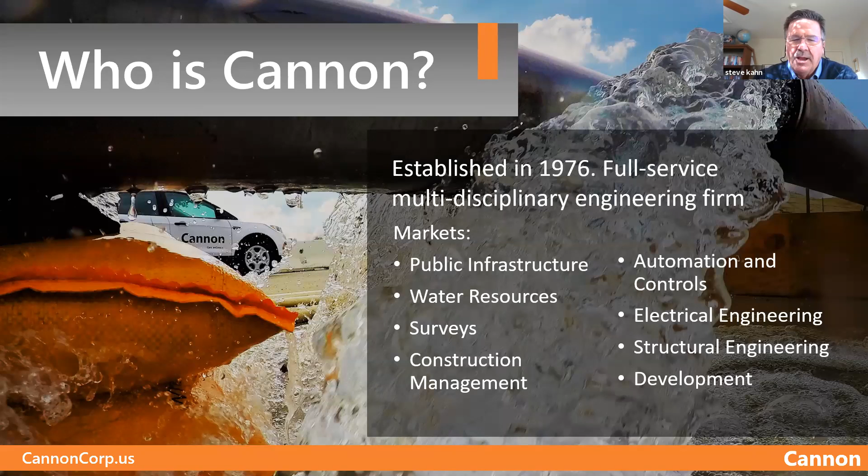Thank you, Amy. Again, my name is Steve Kahn. I'm a senior principal civil engineer for Cannon, and I would like to briefly tell you a little bit about Cannon Corp. We are established in 1976. We're a full-service, multidisciplinary engineering firm. That's a real mouthful, but that's what we are. Below listed are all the markets that we work in, and I'm going to tell you briefly about those markets.

Our main office is in San Luis Obispo. We have offices in California and Washington. Our office in San Luis Obispo is on Southwood Drive near Sinsheimer Park. It's a nice modern facility. All our conference rooms have video conferencing capabilities. We do a lot of video conferencing with our other offices, so when the pandemic came around, the system worked really well.

Our services: we do public infrastructure, led by Larry Kramer. Active transportation, we do funding administration, helping agencies deal with federal funding. A lot of streets and highways, design and construction management. We also do water resources - water, wastewater, stormwater - that's led by Larry Kramer also.

We do electrical engineering, also led by Jeff Spanbauer - pretty impressive group. Medium, low, and high voltage systems, arc flash, everything to do with the delivery of electricity to facilities.

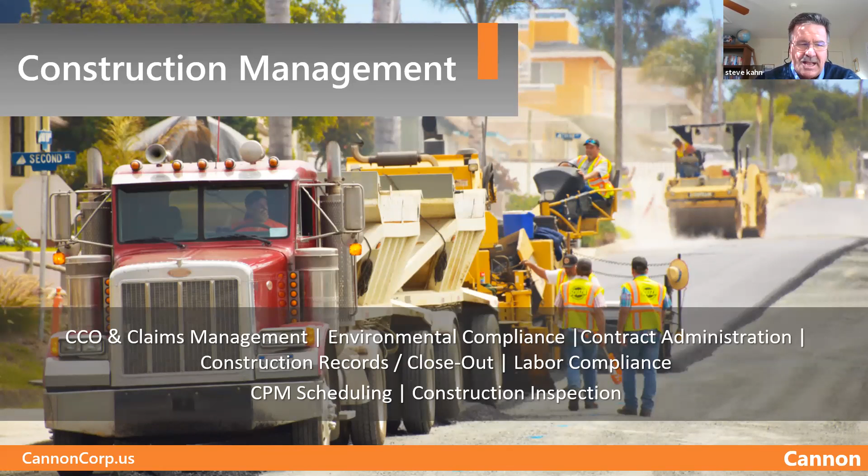We do a lot of surveying, all the surveying listed below with what we do. We also do construction management. I recently completed the Shell Beach Road project for the city of Pismo Beach, and also the Pismo Beach Promenade at the pier. We managed that project for the city, and whenever you get down to Pismo Beach, check out the new Pismo Beach sign by the pier and the slide. It's really quite an impressive facility.

We do energy and industrial throughout the state of California. We do a lot of work for Southern California Gas. And then we do structural engineering throughout the state. We also do a lot of development engineering. We do a ton of work for Cal Poly. We do commercial, industrial, and residential projects.

Some of our local clients: Vandenberg Air Force Base, we do a ton of work at Diablo Canyon. I just completed the construction of a road for PG&E from the power plant to Montana de Oro. Residential projects, we're doing work for the city of Morro Bay, delivery of water and wastewater collection, roads for Oceano, Grover Beach.

And then we're very involved with Cal Poly. Mike Cannon, the founder of the company, is a Cal Poly alumni, and so am I and many of our employees. We sponsor the Water Lab, the Concrete Canoe Program, the Cal Poly Golf Tournament, and I'm on the Cal Poly IAB board to help the civil engineering department set their curriculum.

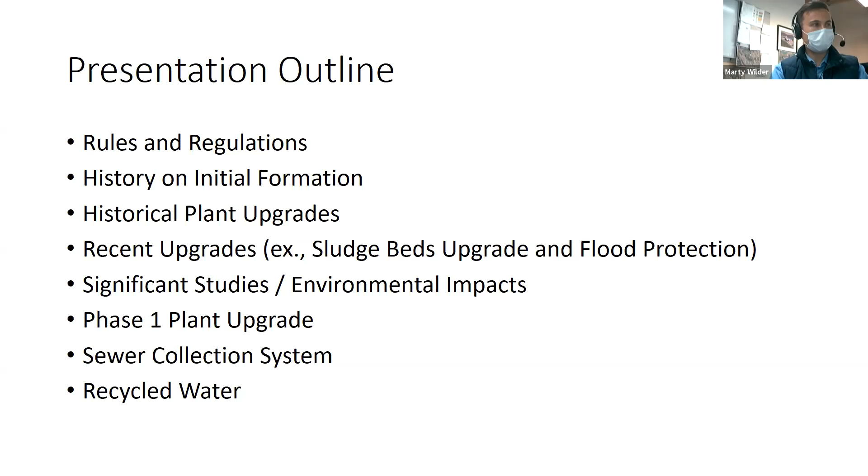So rules and regulations: the district was formed pursuant to the Health and Safety Code. The reason why it's called Laguna County Sanitation District is because it's pursuant to the County Sanitation District Act.

It's a dependent special district to the County of Santa Barbara, meaning that the Board of Supervisors act as the Board of Directors for the district.

A little fun fact, per the Health and Safety Code, as a county sanitation district, we may make provision to enable street cleaning services, street sweeping, refuse transfer or disposal, or even water treatment and distribution. Right now, we're only exercising one of those four arms, which is sanitation services: sewer collection, treatment, and disposal.

We're named after the Rancho Punta de la Laguna, and in another slide I'm going to show some historical maps, and you'll see why that's the case.

In the Santa Barbara County Code, chapter 29 really has a lot of meat there that we lean on, and 24A contains enforcement provisions for violations. We're regulated by state and regional water resources control boards for treatment and disposal of wastewater.

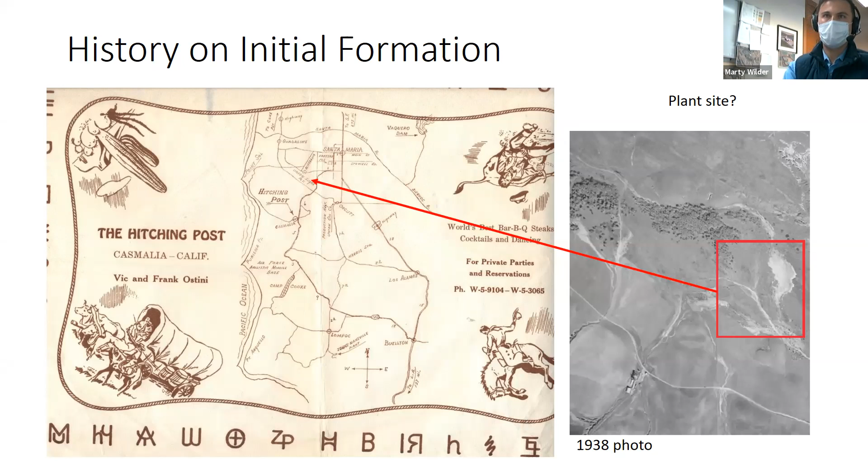The initial firm, I'll tell you their name because we'll pay homage to them: Whipple, Adamson, Murphy, and Pearson. They generated the initial boundary, at least what they thought it would be, and put a lot of thought into the construction cost estimate, which led the Board of Supervisors to thinking about how they were going to finance the original plant.

The cost to build at the time was $1.4 million. In today's day and age, that's greatly inflated, so you can imagine what it was back in 1960.

Options for financing that were thought about at the time were bonding, but the district couldn't afford the upfront cost, which was around 10%. So they actually considered selling general obligation notes for about three-quarters of the amount, but even then, that wasn't enough to cover the whole $1.4 million.

So they were able to successfully get a federal grant for $250,000, and then the county stepped up to the plate and promised to pitch in the rest if the district was not able to recuperate connection fees to pay the remainder in time.

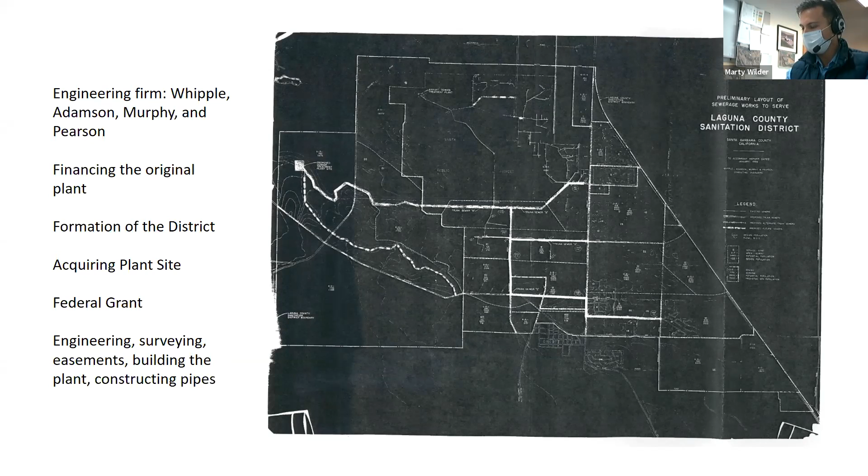Here are some maps showing where they happened to locate the plant. It's called Laguna County Sanitation District, like I mentioned before, because it's located on lands of Punta de la Laguna, which happens to be the name of the subdivision. There actually used to be a lake that would form there. Since then, farmers have modified it such that it does not form anymore unless it's a very, very wet year, and then only portions could form. But approximately at the southern edge of Lake Guadalupe is where the plant site is.

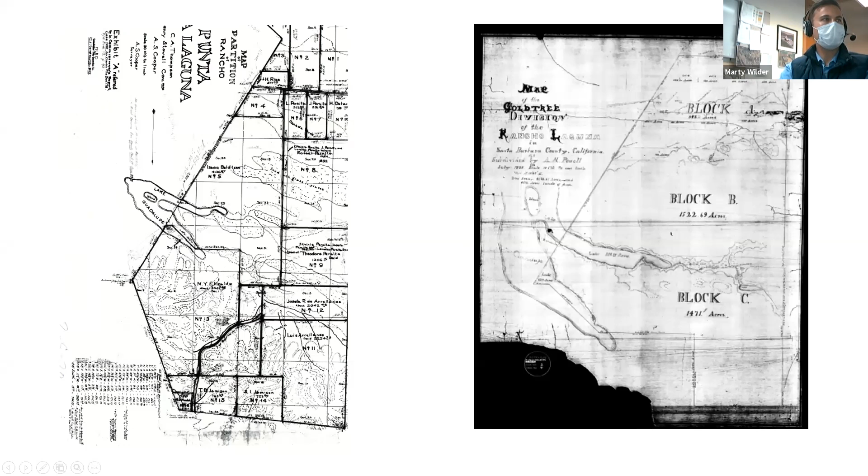It was put into operation on December 7th, 1960. So if you do the math, that's less than two years from the initial forming of the district to putting the plant into service, which includes all the engineering work, then putting the project out to bid, then building it. I think that's a very significant feat.

So let's talk a little bit about the original plant. Happens to be a conventional trickling filter plant. So I'll give a brief background on wastewater treatment plants and how they work.

There are 3 different types of treatment: physical treatment, biological treatment, and chemical treatment. Physical treatment, for example, like screens or using gravity clarifiers to separate suspended solids, or even using more modern filters like reverse osmosis to remove dissolved solids like salt. Biological treatment, for example, a trickling filter removes carbonaceous material, which lowers the biological oxygen demand, which is good for discharging into a water body. Chemical treatment, for example, chlorine disinfection.

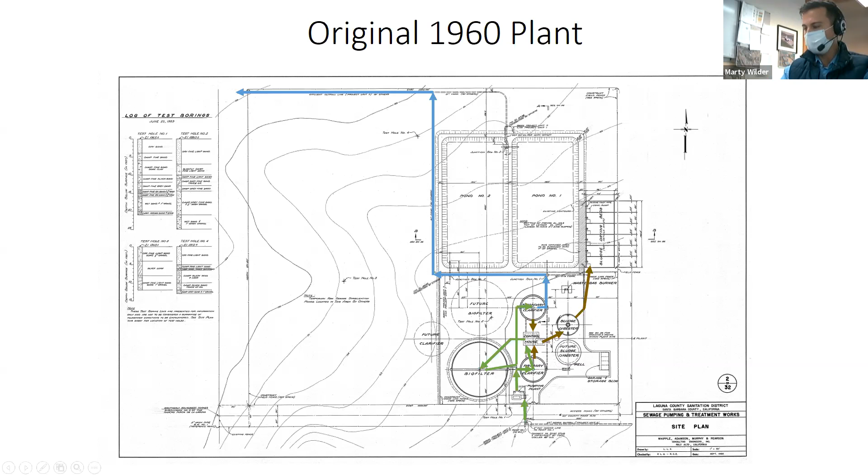And then the brown lines show where sludge goes to, and it would go out to sludge drying beds. I want to share a little more about the original plant. It was designed with a capacity of 1.6 million gallons per day.

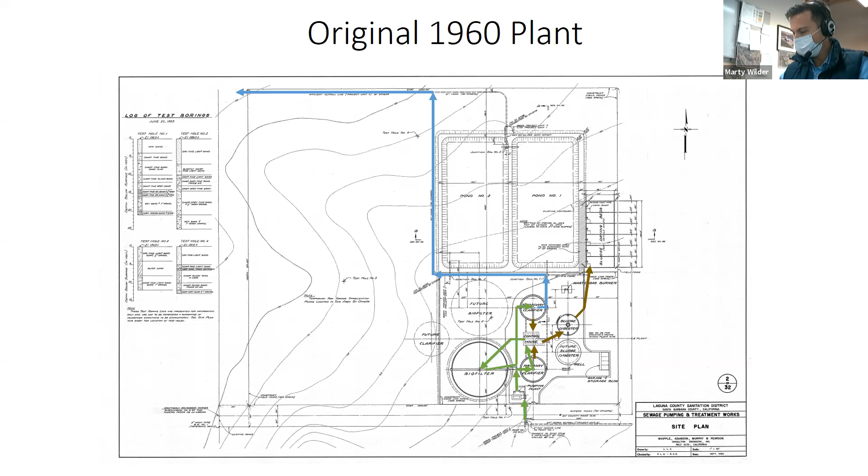The 1974 plant upgrade designed the project with a capacity expansion to 2.4 million gallons per day by making pond modifications, adding a grit chamber, a primary sludge digester, and a chlorine contact basin.

A holding pond, pump station, and pipeline were also constructed to facilitate irrigation and discharge to additional land areas. So by this time, they actually were starting to irrigate by land disposal instead of discharge into the creek.

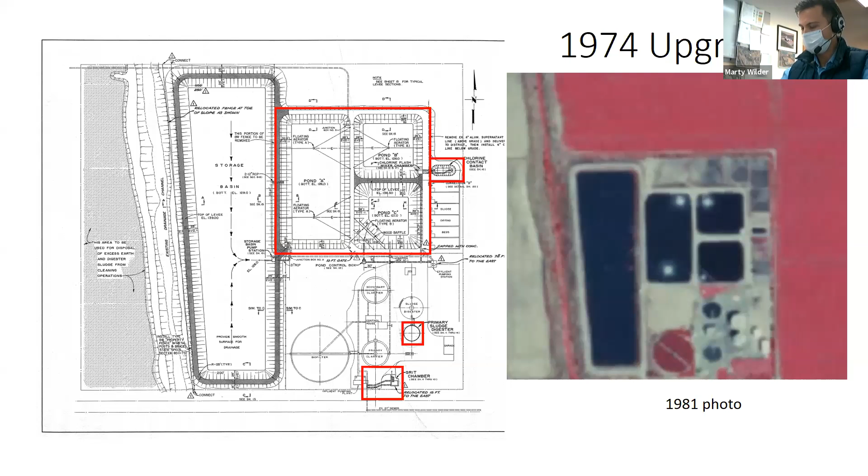The 1986 plans designed a project with capacity expansion to 3.2 million gallons per day by making modifications to the influent structure, adding a secondary clarifier, converting the existing north secondary clarifier to a primary clarifier, and adding ferrous chloride to the primary digester. Although the plant was expanded to 3.2 million gallons per day, an order from the water boards limited the discharge to 2.4 million gallons per day.

This limit applied until objectives for total dissolved solids, sodium and chloride, also known as salt, described in the water quality control plan for the Central Coast Basin plan adopted by the water boards, were achieved if the discharge was outside of the designated recharge area. Discharge continued to be via irrigation.

However, this sugar beet factory, which was the primary source of irrigation demand in Betteravia, closed down in 1993, and irrigation switched from sugar beets to solely beef cattle pasture. The main recharge area had a limited discharge capacity based on evapotranspiration, and therefore the district could not accommodate new customers pursuant to growth planned in the Orcutt Community Plan, resulting in a building moratorium.

So you can imagine that that's not good. We want to try and avoid that.

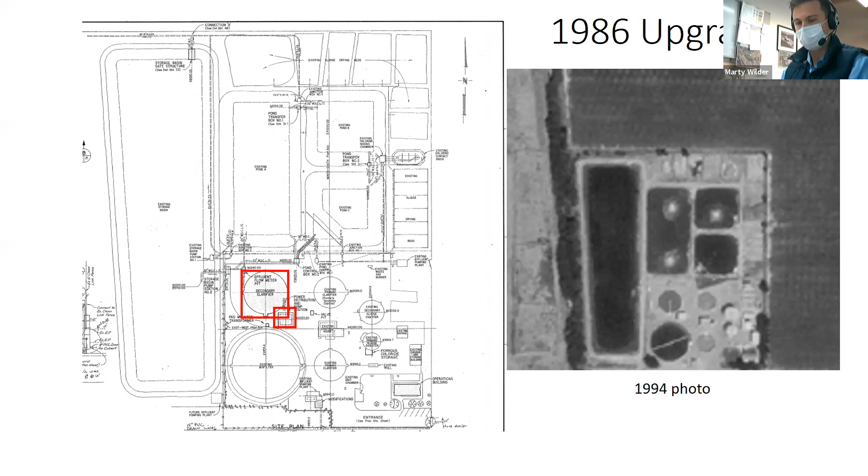The 2001 plans really tried to get us out of that building moratorium, designing a project that addressed the regulatory upgrade requirements to comply with the water quality objectives for groundwater, for TDS, total dissolved solids, sodium and chloride.

Studies adopted into the water quality control plan for the Central Coast Basin demonstrated that there is a dramatic increase in salt load from the point of use to the sewer system. This increase in salt load is partially due to the typical mineral pickup from domestic water, but primarily due to the prolific use of regenerative salt load water softeners.

Nearly all of the potable water supplied to customers by the local water purveyor is hard groundwater, meaning it has relatively high levels of calcium carbonate and equivalent. To combat this, there's actually a prohibition for new houses to have salt load water softeners.

But so what this plant did is it built a second treatment train to treat the high salt load flow stream, sized to about 500,000 gallons per day, which got us back into compliance, and the building moratorium was lifted.

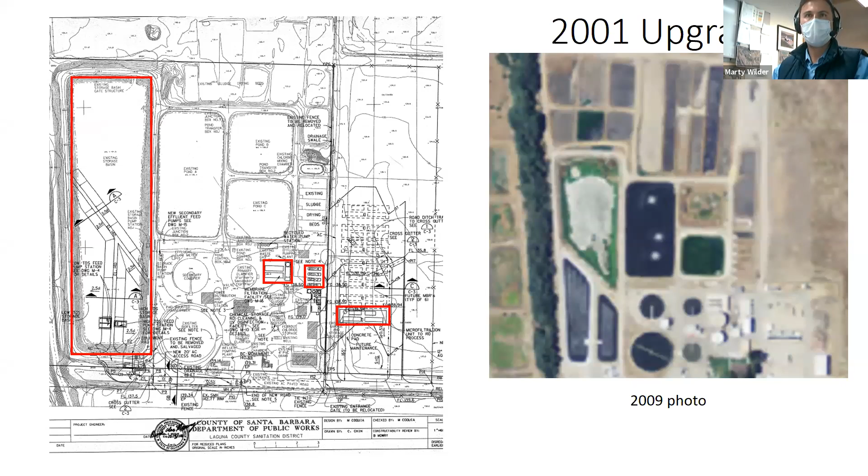So now let's look at the current plant layout. Wastewater initially collects at the influent structure and is diverted to the aerated grit chamber, then back to the influent structure for screening. Primary settling occurs at the two primary clarifiers, which we previously discussed.

Secondary treatment is achieved through the trickling filter. Water flows through polishing flow equalization ponds, followed by tertiary treatment using ultrafiltration membranes, which were built in the 2001 plant upgrade.

Reject from the ultrafiltration membranes, or screened flow from the low TDS flow, is stored in a shotcrete-lined pond for pumping through these plant processes during the separation of the high TDS flow.

When salt concentrations are detected by an electroconductivity meter in the grit chamber, typically around 5 a.m. to 10 a.m., wastewater is redirected as high salt flow using pumps back to the rotary drum screens and to the high TDS equalization pond.

This flow is pumped over the course of the next 24 hours through a membrane bioreactor, which was built in the 2001 plant upgrade. So that's on the right-hand side.

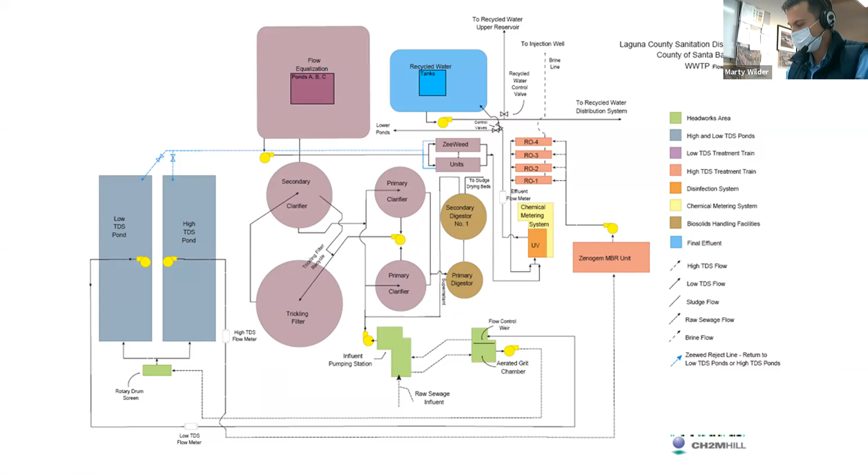The high total dissolved solids permeate is blended with the low TDS permeate as described, then sent to disinfection by ultraviolet light radiation. Final effluent meeting disinfected tertiary recycled water standards is sent to two 1-million-gallon holding tanks with a recycled water pump station to move water to either offsite users or to long-term storage.

Long-term water storage is water that is not used on daily demand and is stored for discharge throughout the year on district-owned cattle pasture. The plant has full backup power generators that are engaged during power outages in order to run the whole plant.

In the event that only undisinfected secondary treatment is produced, for example, if tertiary treatment systems are down for maintenance, replacement or repair, or the ultraviolet dose is not sufficient, water is transferred by gravity to lower storage ponds for later discharge on the district-owned cattle pasture.

Biosolids from the two primary clarifiers and the secondary clarifier are treated through a heated and mixed anaerobic digester, followed by decanting and an unheated, unmixed secondary digester. Sludge from both digesters is sent to sludge beds for drying and hauled off annually, happens to be to Engel and Gray composting facility, which is nearby.

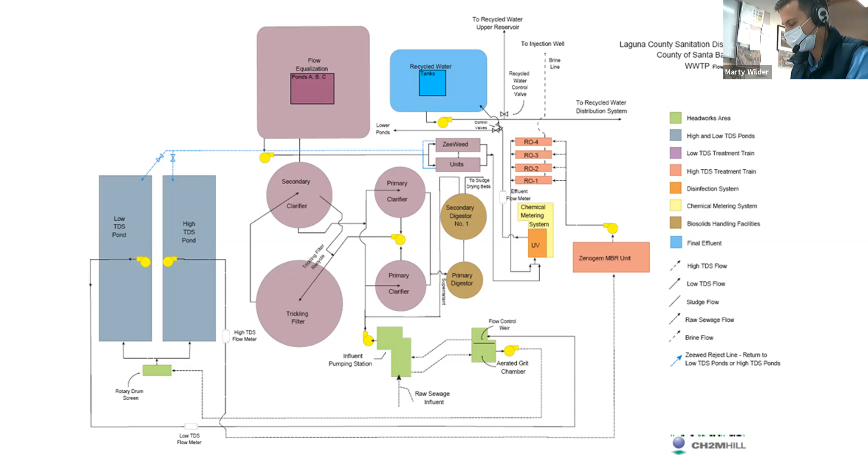All right, so now that you know what the plant currently is, which dates back to around the 2001 upgrade, let's talk about significant studies that were done from then until now.

In 2001, we hired a consulting firm, CH2M Hill, to produce a report entitled Wastewater Reclamation Treatment Plan, Conceptual Master Plan for Build Out to 7 million gallons per day. This report reevaluated the connection fee based on the regulatory compliance upgrade, the 2001 upgrade, and anticipated future improvements.

In 2008, the same firm produced another report. This report analyzed the cost of various effluent discharge mechanisms, environmental regulations, permitting, and physical capability limitation factors.

Given the conventional useful life of 40 years for much of the existing plant facilities and limited redundancy, the district commissioned a master plan in 2010 to assess existing plant facility condition, useful life, functionality, future planning, regulatory climate, and costs for improvements. The master plan identified several projects, including solids handling improvements, replacement of wastewater treatment facilities, and a future expansion.

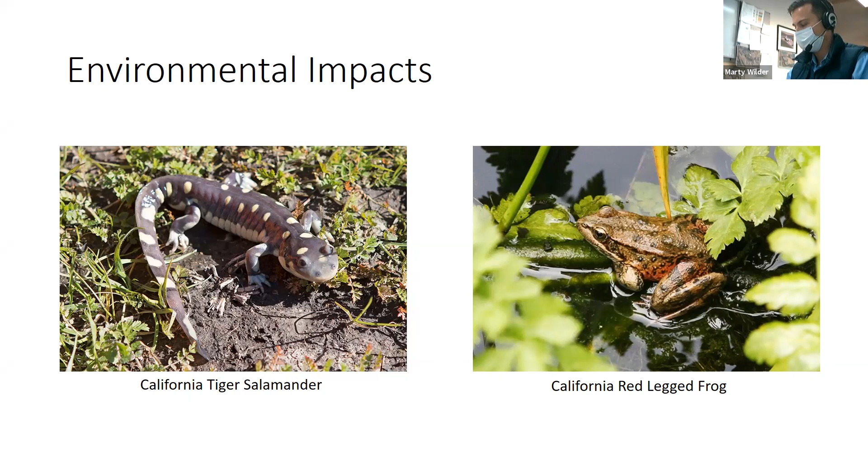Other miscellaneous projects we started working on almost immediately included burying a 12-inch effluent recycled water line heading to the reservoir. At the time it was just laid flat on the ground, but we wanted to bury it so it's more protected from the sun and from people driving over it.

We also created a vernal pool. Quad 3, as I mentioned before, is the documented breeding resource for California tiger salamanders and red-legged frogs. In the past couple years there hasn't been much documented breeding activity, which isn't alarming because it has to do with rainfall. There have been times when biologists won't find them for a couple years. They come out to breed when it rains, then go hide in burrows created by other small mammals such as gophers, sometimes for years on end.

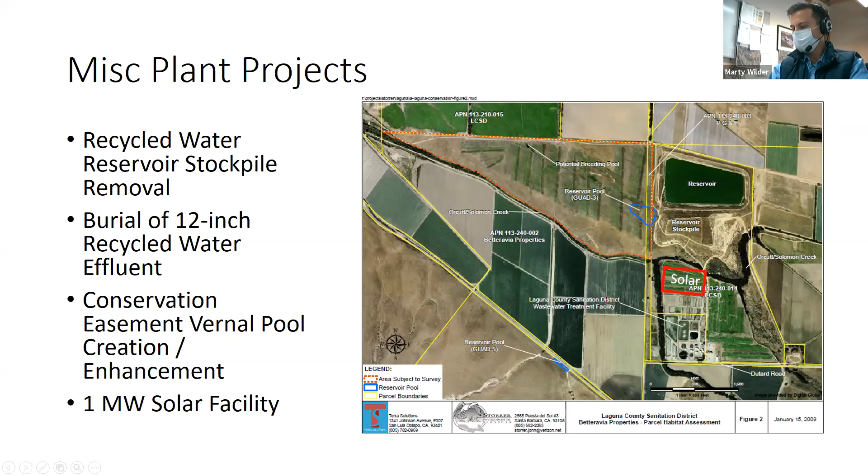Total project cost was around $4 million. Yane Associates was the geotechnical firm for the initial study and review during construction. Earth Systems Pacific handled compaction testing, construction testing, and concrete testing. Cannon was the design engineer and also helped with submittal review during construction. We did construction management in-house.

Some brief facts about sludge: it comes in from primary and secondary clarifiers and enters the sludge beds at about 5% solids by weight, which is pretty soupy, not very solid at all. Then it dries up to 85% solids, which is almost like moist soil. We produce several hundred tons annually.

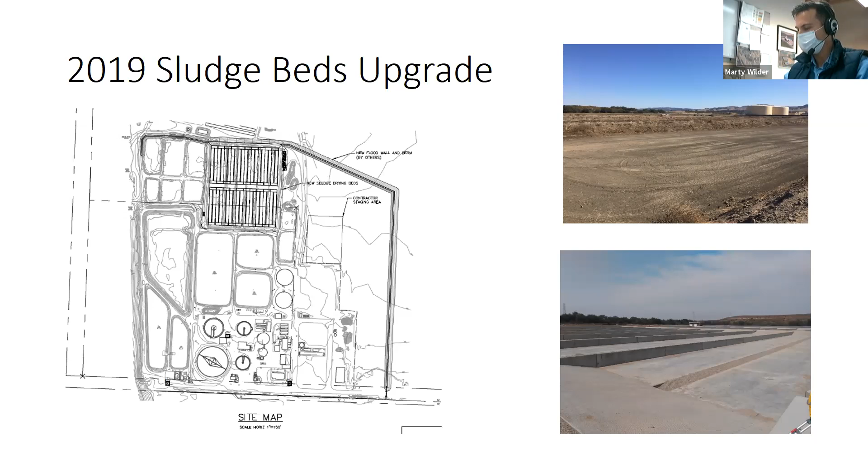This project is substantially complete, with final completion scheduled in the next week or so.

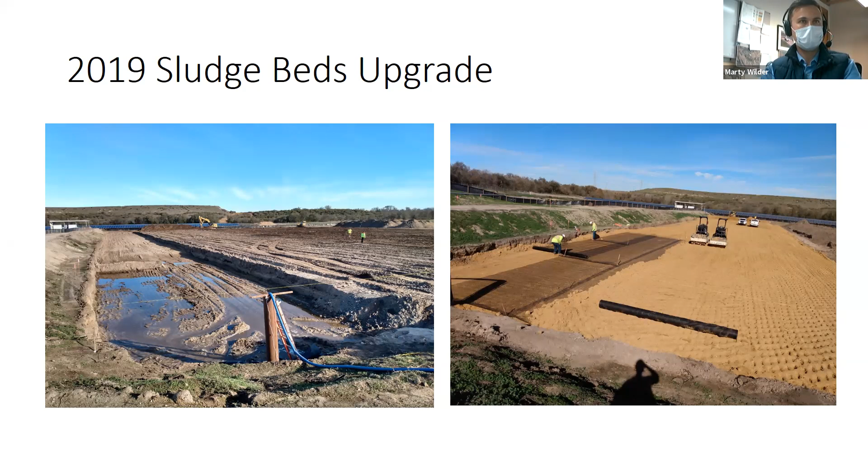Some challenges we faced during this project: when we did our initial over-excavation, we hit a perched water level, and in the left photo you can see the water we hit. To combat this, working with Yane Associates, we used geotextile and geogrid, and in cases where it was really bad, we put two layers of it. The golden dirt, as we'll call it, is actually from the reservoir soil stockpile, so it had optimum moisture and good compaction characteristics. We did this for the whole site.

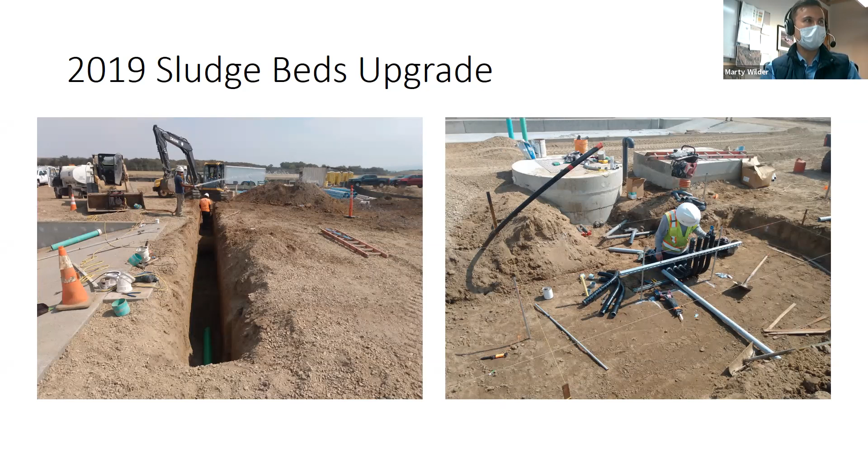Other challenges we faced: in the right picture, we upsized our electrical feeding to the wet well. On the left, we found out there's state criteria that even when the biosolids are dried to 85% solids and ready to be hauled off, the state wants us to place it on a lined surface. To do that, we're designing a pad with a little drain for when it rains, and we extended a drain out to that facility, which is actually going out to bid pretty soon.

The next project we worked on simultaneously was our flood protection project. 2011 and 2014 flood studies, which Penfield and Smith helped with, determined that the plant was in a 100-year floodplain. So they designed a flood berm with a concrete slurry core and a flood wall to extend around the perimeter of the facility, as well as the future plant upgrade.

We put this out to bid with a total project cost of $1 million. We did apply for a federal grant, but unfortunately we were unsuccessful. Just to give a little background, there was $400 million of requested applicants with projects equating to $400 million, but only $100 million available.

This project was needed prior to the phase 1 plant upgrade, and we were able to successfully complete it ahead of schedule. Construction management was in-house. Stantec was the design engineer and provided review during construction. As you might be aware, Penfield Smith actually changed names and got absorbed by Stantec, so that was a pretty smooth transition since they helped with the flood studies. Earth Systems Pacific helped with the geotech for the initial study and field testing.

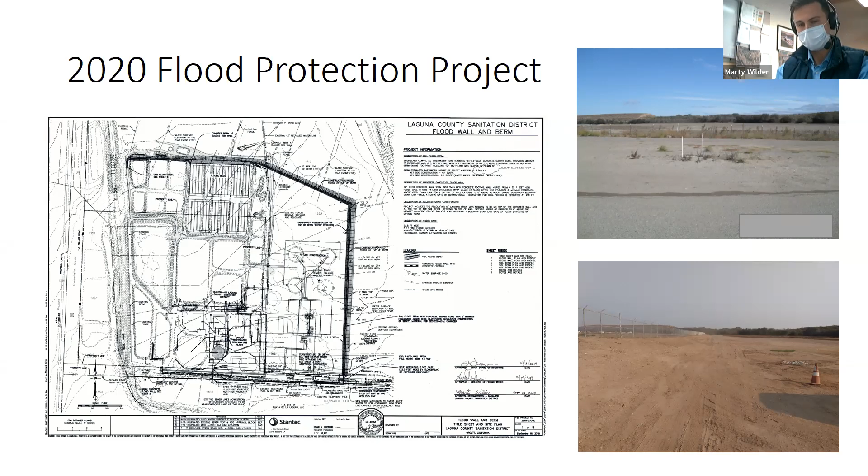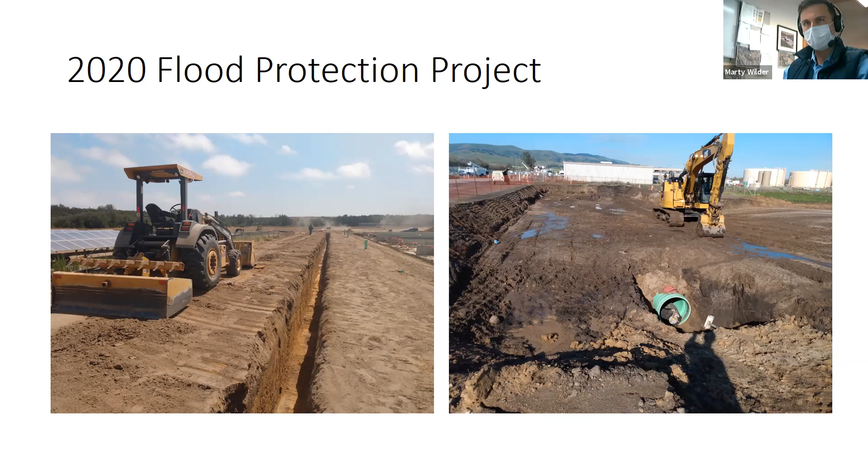Some project challenges we had to coordinate - again this was during construction of the sludge beds project. We had to coordinate excavation of the northern part of the flood berm slurry core, shown on the left-hand side. Also, we had to install the first leg of 36-inch pipe, which was used by the plant upgrade, so we had to make sure it was surveyed in correctly at the right slope, and pressure tested and mandrel tested and all the above so it could be used for the plant upgrade. In addition, over-excavation was done for parts of the berm that had substandard material.

Other challenges we faced - on the left-hand side, that's where the flood wall foundation was being built, and there was a conflicting electrical utility. So we flip-flopped the location of the keyway for the foundation to overcome that. In addition, similarly to the sludge beds job where we used geotextile mat, we did the same thing for the foundation of the flood wall.

On the right-hand side, we had an issue with our telephone pole. We had to dig next to it, and during a really windy day, a couple hours later the telephone pole started to sag over in the direction of the wind that was blowing. So we had to call Frontier out to hold the telephone pole to make sure it didn't fall over.

I think it might have been Frontier that had the idea, but we said, hey, while we're doing this, you might as well try and underground the telephone line. So before the flood wall concrete was formed, we put a 4-inch pipe in on the outside edge, which we'd already expanded an additional 6 inches anyway, so it did not conflict with the foundational characteristics of the flood wall. That was, in a sense, a good thing, because now we have our telephone line undergrounded.

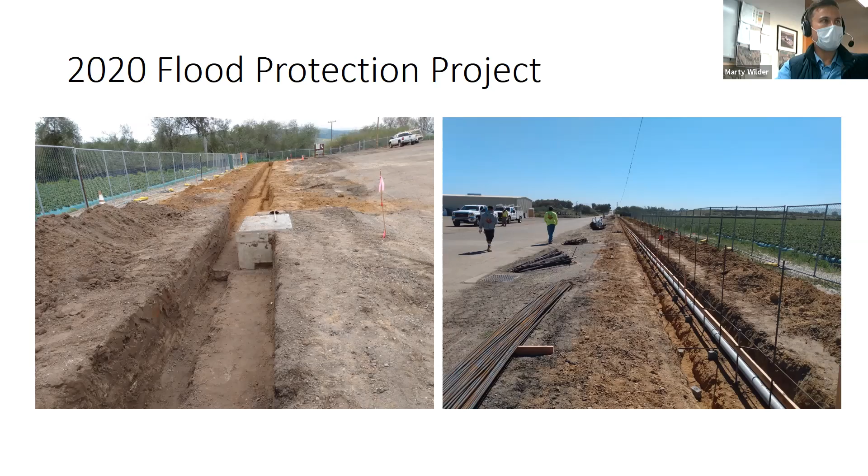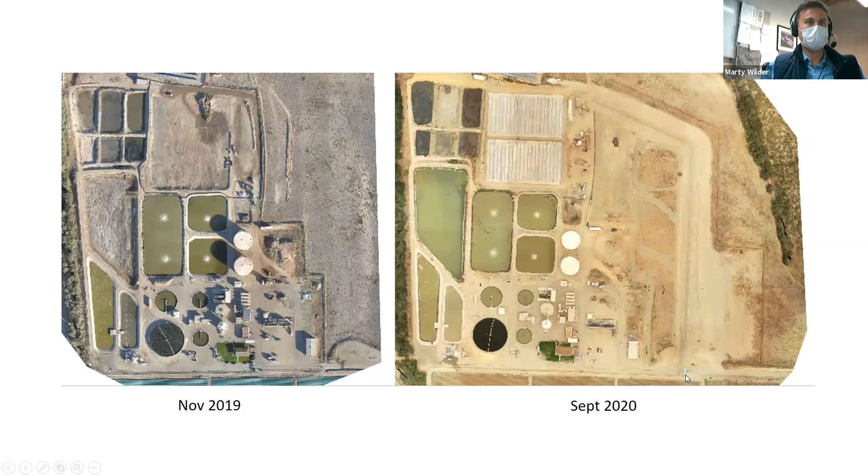Then in September 2020, you can see the sludge beds with all the concrete poured, and I think just shortly after this, asphalt paving was done around the perimeter. You can see the flood protection, flood berm extending around the eastern side of the plant, and on the south, a little harder to see, that's where the flood wall is. There's also a flood gate, passively activated, located at the entrance.

So now that we talked about those projects, our phase 1 plant upgrade actually just started construction in October and is on its way. The low bid for that came in at $53 million, which was within approximately 7% of our engineer's estimate.

It's funded by a mixture of capital, district capital reserves, and a 20-year term long loan with a certificate of participation. Geotech was Earth Systems Pacific. Design was Carollo, Cannon, and Pulse Architects. And construction management is through MNS.

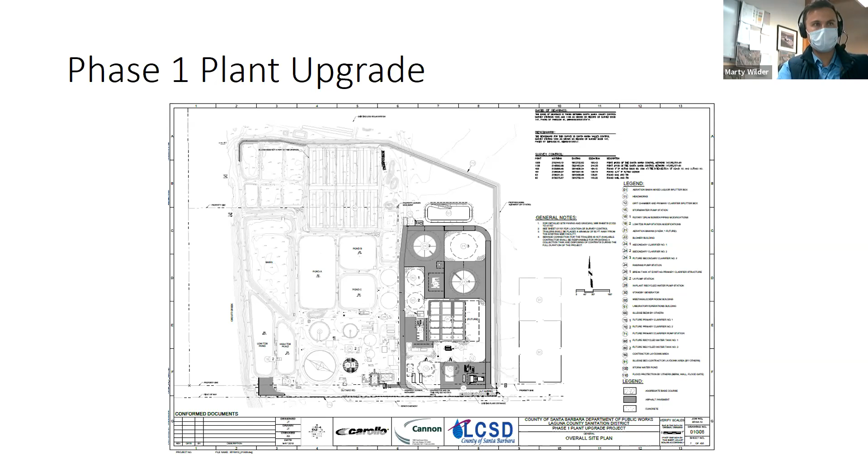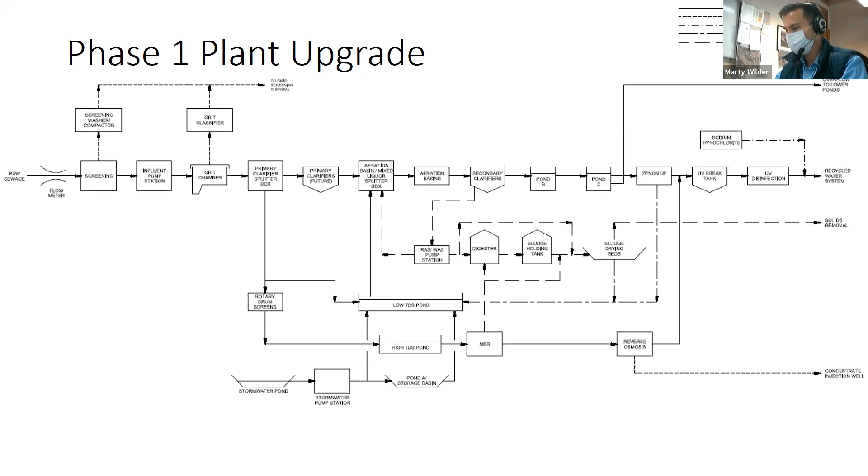But as you can see, wastewater initially collects at a new screening facility, located slightly to the east of the existing headworks. Then there's a new grit chamber, and there's capability for new primary clarifiers, though currently we're not putting those in. We're going to be installing conventional activated sludge with new secondary clarifiers, which will, in a sense, replace the older side of the plant.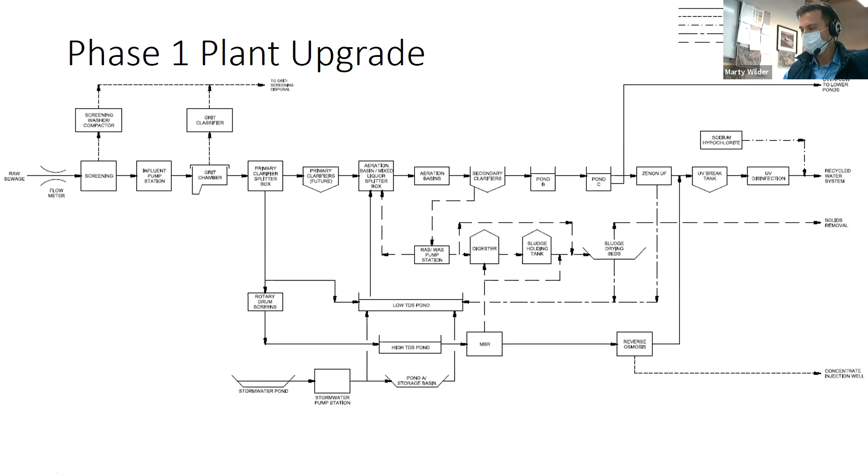All right, so now that we've talked about our plant in probably more detail than you want to know, let's talk about our sewer system.

It was initially built out in 1960, with a couple trunk lines extending out to some housing tracts. Since then, it's definitely spread out. It's actually absorbed 3 other sanitary districts, one being the Orcutt Sanitary District, in Old Town Orcutt, where there used to be a treatment plant and pipes built back in 1905. Shortly after the district was formed, Laguna actually absorbed them.

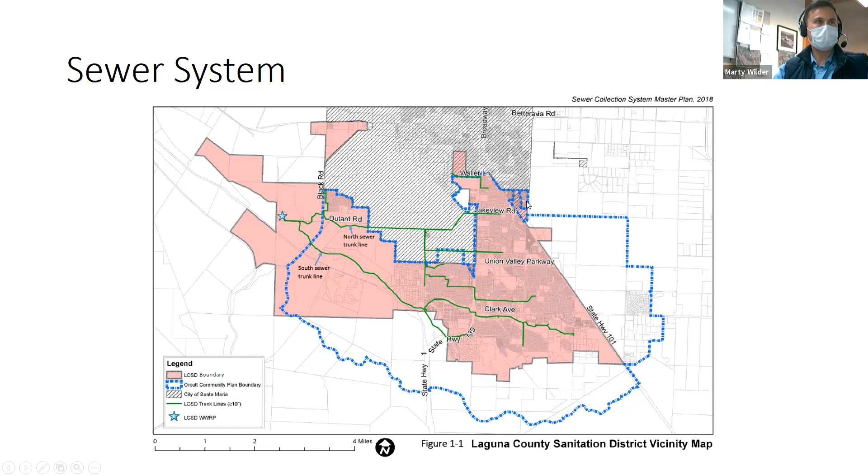And 2 other sanitary districts, the Evergreen Acres Sewer Maintenance District and Lakeview Sanitary District, in 1975, which flow through a joint powers agreement with the city of Santa Maria. This map shows the extents of our current service territory, as well as the Orcutt Community Plan shown in blue.

All right, so just like everything in life, we have to repair it when it breaks, and the sewer system is no exception. We have a video inspection program where we characterize defects or the condition of pipes on a routine basis. We have various spot repairs throughout Orcutt. We also have longer length repairs or complete replacements, shown on the right.

These are all ranked based on priority. We might do a handful per year, depending on funding and also the critical nature of it.

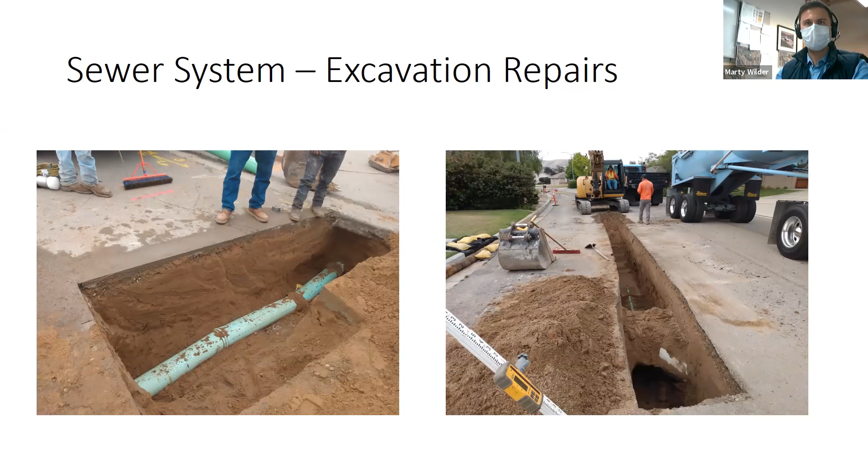We also do trenchless repairs. The one shown was done most recently on the older segment of trunk line that was originally built, with photos shown located over by the airport. Trenchless is, I think, the future for sewer system repair. It makes it so you don't have to excavate the ground to remedy the pipe.

What's shown in the middle is actually a light train for a special type of trenchless lining, which uses ultraviolet light to cure a resin impregnated felt liner. On the left-hand side, they're pulling it in through the manhole top, and once it's in the pipe, they inflate it and run this train through it. After about an hour or so, the pipe is seemingly ready to be put back into service.

On the right, I won't get into too much detail, but this pipe in particular was made with asbestos cement, and we met with various consultants and decided to go with the safest route, which was to treat this like an asbestos abatement job. So that's what these tents are shown for.

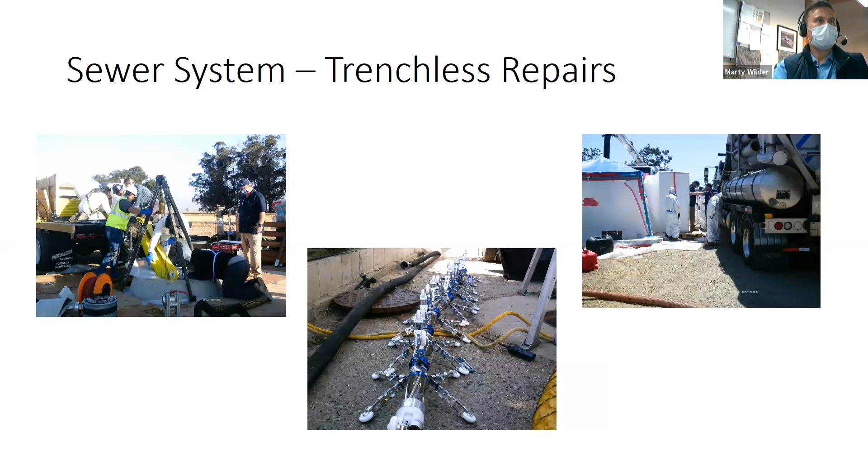We also have capacity upgrades. There was one done back in 2011, which was based off of a 2009 capacity study that Penfield and Smith helped us with. In 2006, state regulations required a capacity study to be done.

So in 2011, the segment shown here feeds several housing tracts, and the sewer model at the time showed that even during the existing condition, it was subpar to capacity standards. In 2018, we updated this master plan and found that there's no more upsizing needed in the existing condition. However, several more are needed in future build-out scenarios.

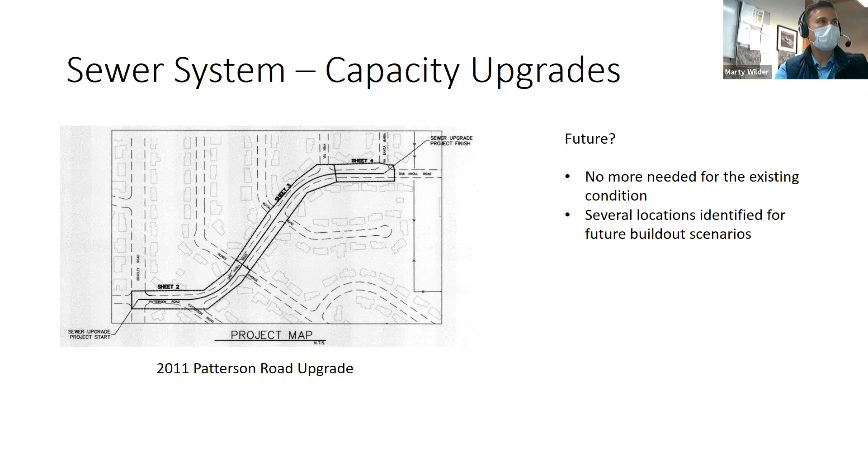All right, so now that you know about the sewer collection system, let's talk about our recycled water pipelines.

Current daily flow into the plant is about 1.67 million gallons per day. Brine waste and sludge flows are approximately 0.07 million gallons per day, such that recycled water flow is 1.6 million gallons per day. Prior to California drought restrictions, daily flow was about 2.05 million gallons per day. The highest daily flow was around 2.5 million gallons per day.

Like I talked about before, peak long-term storage needs was the reason why we built that recycled water reservoir. And that equates to approximately, we need about 165 million gallons.

Discharge is accommodated by distribution to offsite locations. Right now, we have a primary user agreement with the Santa Maria Public Airport District and Santa Maria Energy LLC. Actually, strawberries are irrigated over at the airport.

Current discharge capacity is approximately 2.4 million gallons per day. The reason why that's significant is because since we are solely a land discharger, we're limited by both influent, or how much our plant could treat, versus how much our plant can dispose of. So at this point, the weakest link is our discharge capacity at 2.4 million gallons per day, as opposed to our treatment capacity, which is 3.7 million gallons per day.

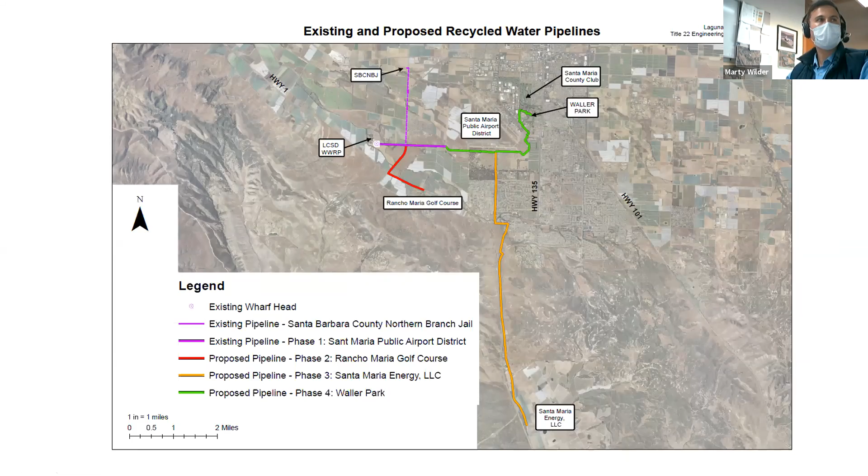All right, so to briefly review what we just talked about: our rules and regulations, history on initial formation, historical plant upgrades, recent upgrades, significant studies, environmental impacts, our phase 1 plant upgrade, our sewer collection system, and recycled water. So you guys should be experts on the district.